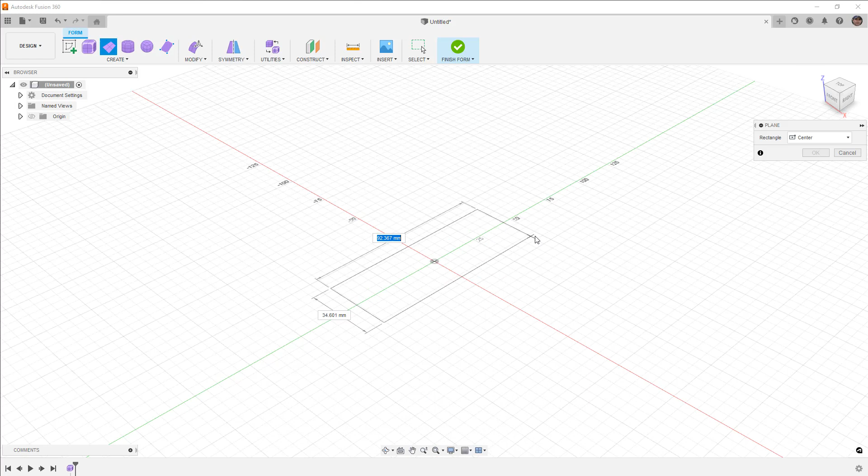So we'll get started by creating a new form, and just like with most forms, we're going to start with a plane. Now with this first method, we're going to begin with a plane at the origin. We want to make sure that we have length symmetry, and we don't want to add too many faces here. Once we have our first sections, we want to begin by making what the hull looks like, at least the bottom of the hull from the side.

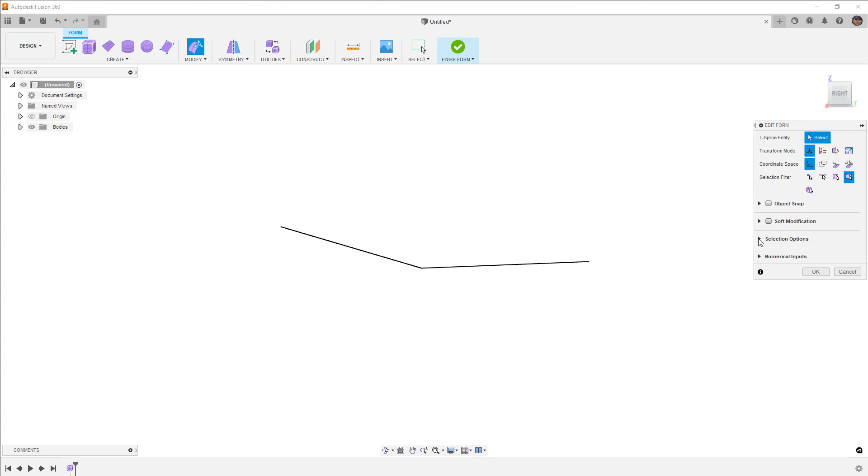So I'm going to go ahead and find my edges. I'm going to move into box display, which is Alt and 1. You can also go into your selection options and select box display here. And what we want to do is just start to build out what this looks like from the side. With these back edges selected, I'm going to hold down Alt and pull this back a little bit, remembering that we never want the transition between edges to be completely straight.

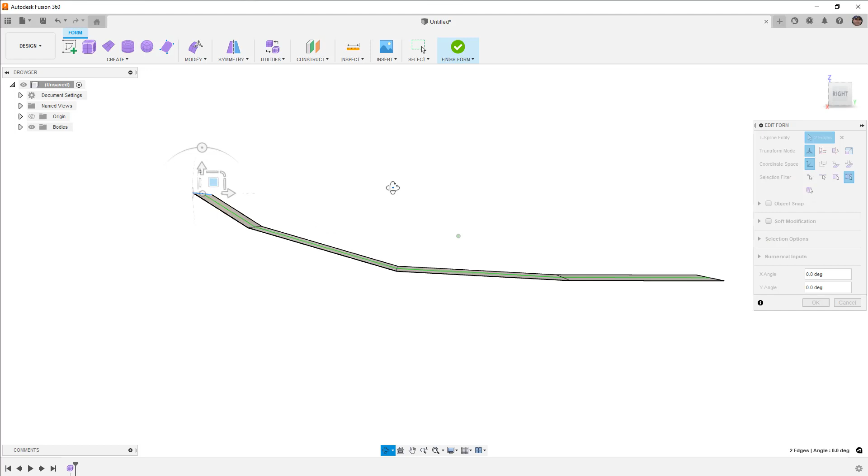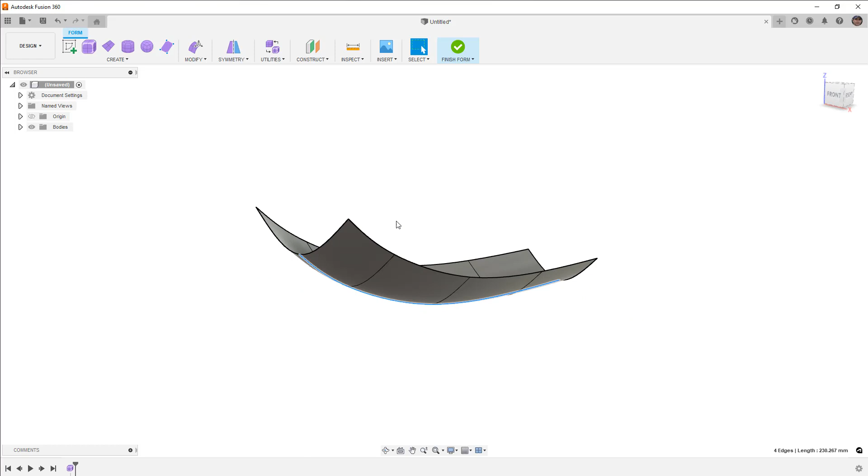Then I'm going to grab the front, hold down Alt, and extrude it once more. Next, I'm going to double click on the midline, and I'm going to simply pull this down. Now, this is not a perfect solution, and you'll notice that I'm not using the Z direction, so my Y distance has gone a little bit off. I'm just going to hit 0 in that box and then hit enter. Now, this doesn't look much like a boat, and if we switch to smooth display, it's really not taking much of a shape yet, but that's okay.

What we need to do is start building out the hull shape. The first thing that I want to do is connect this front edge. Now, there are two different ways that we can do this. We can use merge edge, or we can use weld vertices. Both will give you the exact same result. I'm going to just weld these two vertices, and because we have symmetry, it's going to automatically carry that symmetry line up for us, and we'll say OK.

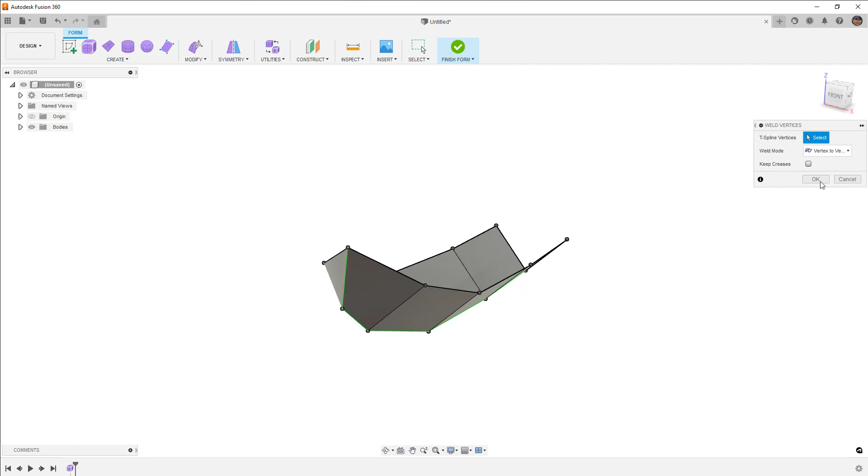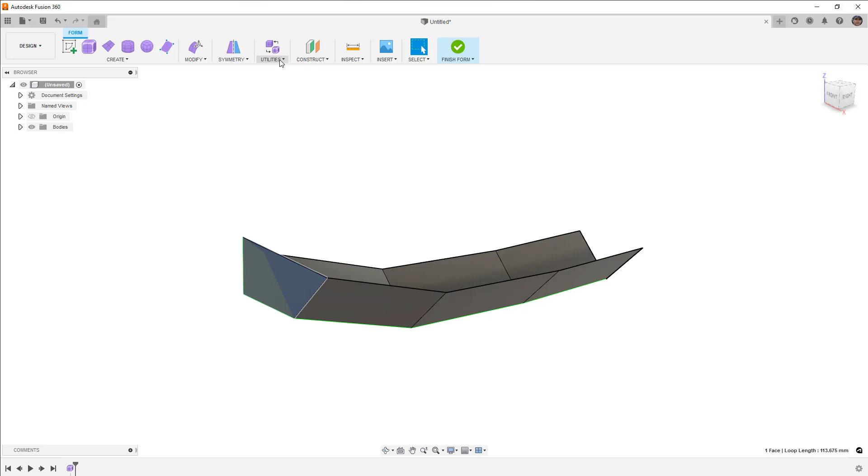Now, at this point, if you try to switch back to smooth display, it will not work. The reason it will not work is because we have this point here, and this point is four-sided faces on both sides, but the point is sort of floating in the middle of space. You'll also notice that the outside shape here automatically has creases on it. Now, when we try to transition from an open face or an open plane and we start to merge these edges, it's important that we go into repair body and notice that there is an error star point here. All we need to do is click on it and it gets converted and everything's fine.

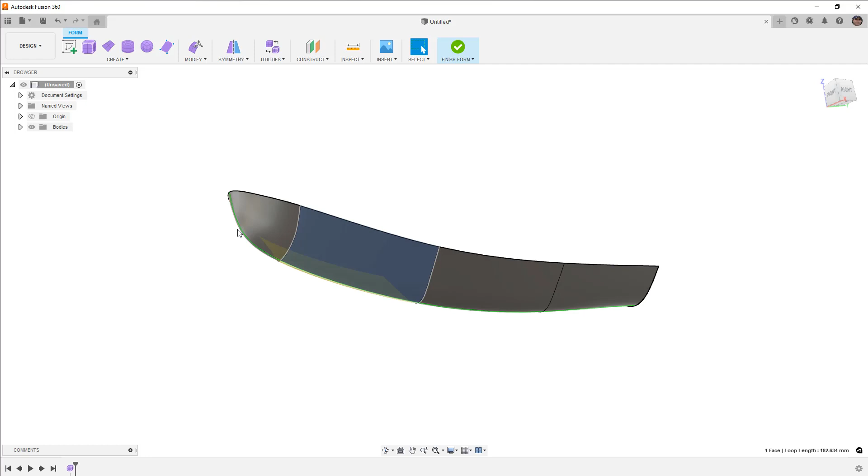The next thing that we need to do is start to think about the tension in these surfaces. Now, the sides are perfectly fine, but because we have this point here, the front is not happy. If we take a look at this in box display, everything looks okay, but because of that point, we get a lot of tension in these surfaces. Now, a couple things that we can do here: we can continue to add edges and try to manipulate the shape, or we can try to turn the front into a triangle. I usually will avoid triangles.

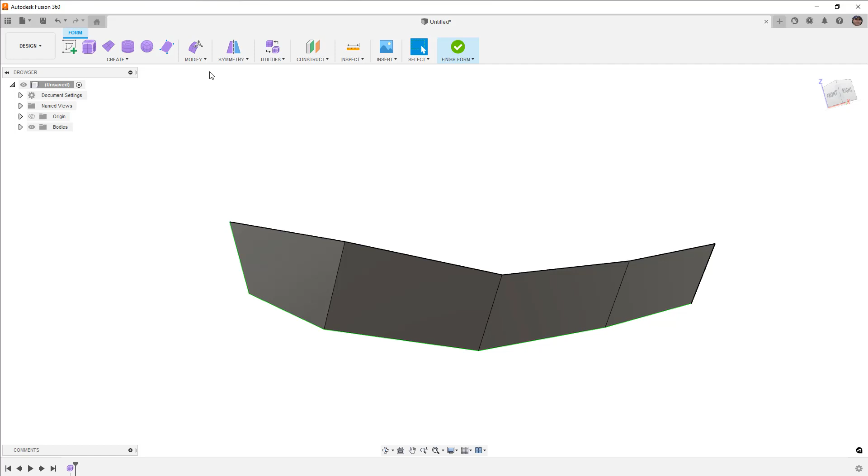I don't think it's a good idea, but let's at least try it at this stage before we add too much detail. To do this, all we really need to do is go to weld vertices. We'll take this and we'll weld it here, and we'll say OK, and then we'll take a look at it in smooth display. So that is a much better solution up front, having these triangular faces, rather than having that vertex that's sort of hanging out in space.

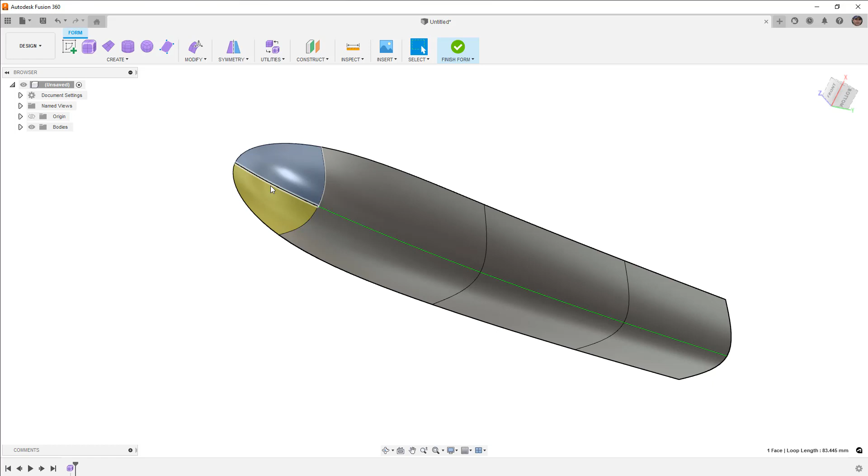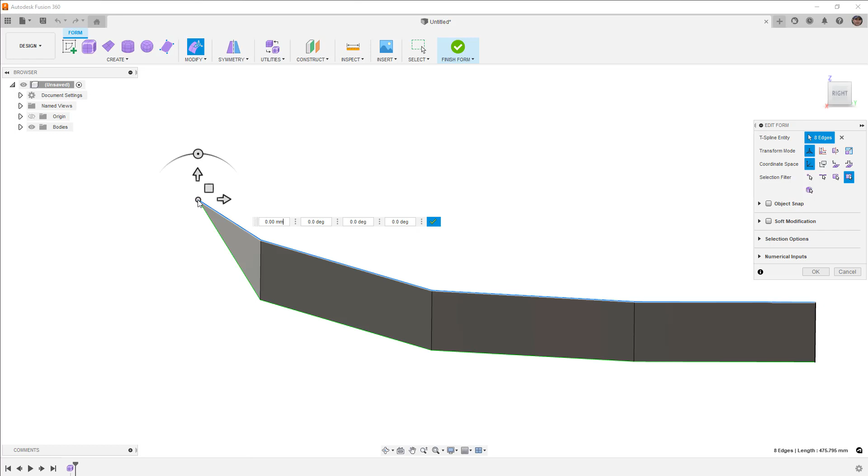So even though one of the general rules that I always say is to avoid those triangles, there might be some designs that really make use of them. Now that we have the general shape, let's start to manipulate it a bit more. With that top edge selected, I'm going to go to my right side view. I'm going to reset my pivot point to the very front, and then I want to scale these edges up. And I'm going to go all the way to 0 and then left click in the canvas area.

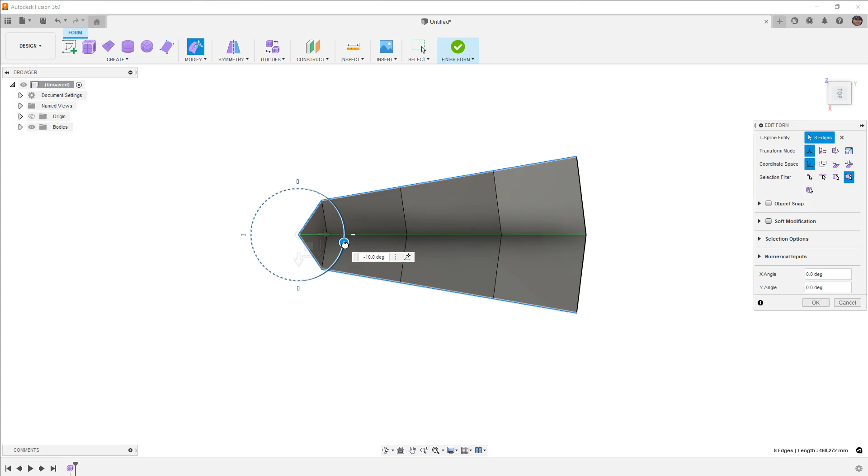Next, I'm going to take the shape from the top. Once again, I want to move my pivot point to the front, and then I'm going to scale them out a little bit. And we can also rotate them because we have symmetry across that midline. Rotating them will allow us to go out whatever the angle is that we've created and start to build out that hull shape. Now, it's not perfect yet, but this is a good starting point.

Whenever we can use the pivot point and scaling edges or rotating edges, it'll really help us control the shape a bit better. But we always do need to remember some of those basic rules. We want to avoid the internal faces having no curvature or no variance between the angles.

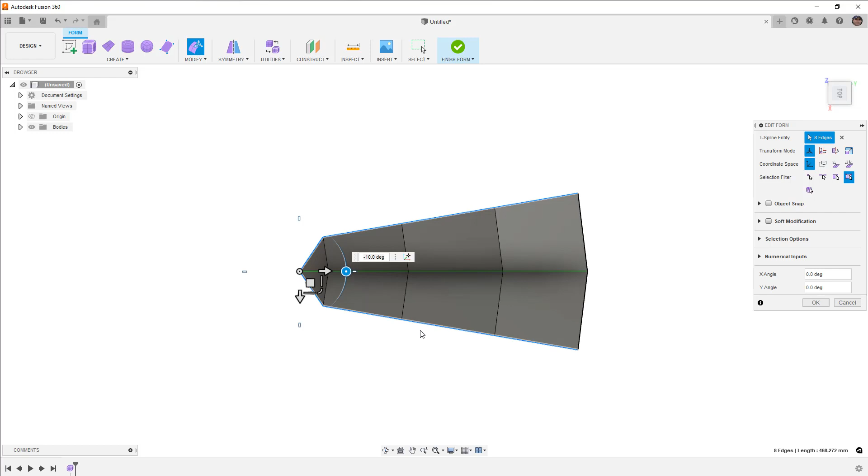This is okay how it is now, but I do want to manipulate the shape just a little bit. I'm going to move things around just visually. I'm not too worried about making things perfect at this point. And then I want to take a look at it in Smooth Display. So once again, very basic shape, but everything is coming together. The next thing that I want to do is I want to continue to add some edges.

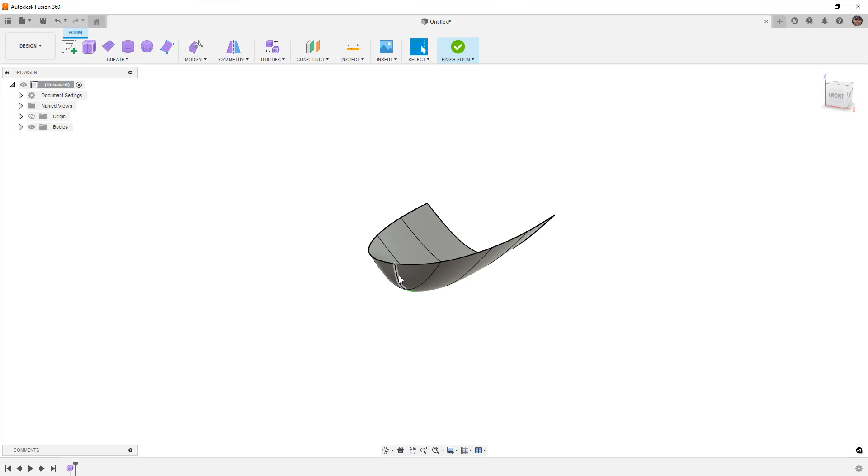Now, once again, I'm not a boat designer. There are a few terms that I'm going to throw around. If they're incorrect, please let me know, but I just want to make sure that we do use some of the proper terminology. Now, this is not a very specific boat. I'm not doing a kayak or a jet ski or a speedboat or ski boat or something. We're just looking at general shapes. But the center section, or the keel that goes down on the bottom, generally does have a bit more shape to it. So I'm going to get started in box display mode.

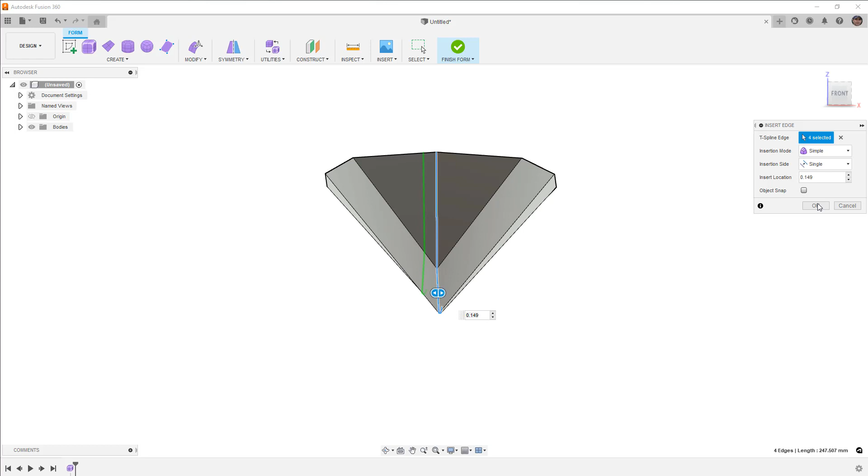I'm going to select that edge, and I want to go to Insert Edge. Remember that when we're inserting edges, Simple is going to put the edge wherever we say, and it's going to maintain a completely straight relationship between the surrounding faces. If we use Exact, we have a little bit less control over where that edge goes, and it's going to subdivide various areas along that path in order to maintain our shape. At this stage in the design, Simple is going to be fine, but we do need to be very careful on how we use it.

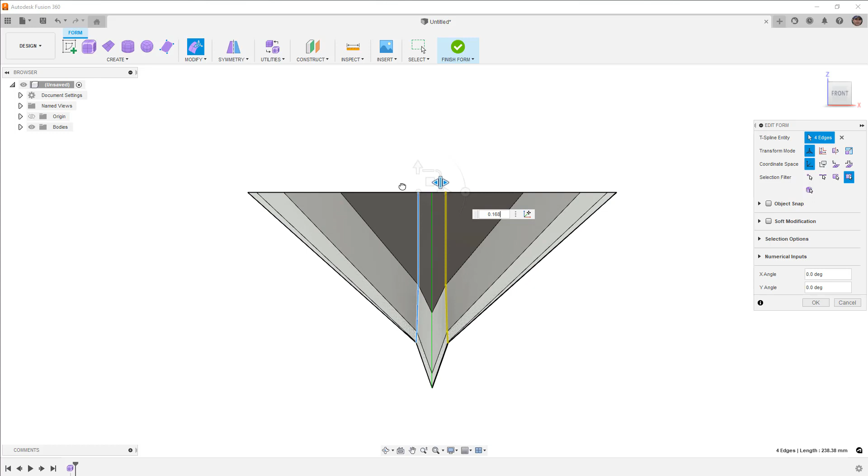So once again, I'm going to select everything here. I'm going to go to Modify Edit Form, and I'm going to reset my pivot point to the top. Then I'm going to scale this down a little bit, and I'm also going to scale it so it's more vertical. And then I'm going to take a look at this in Smooth Display. So again, we're starting to make that keel section where we've got that deep V that rides in the water.

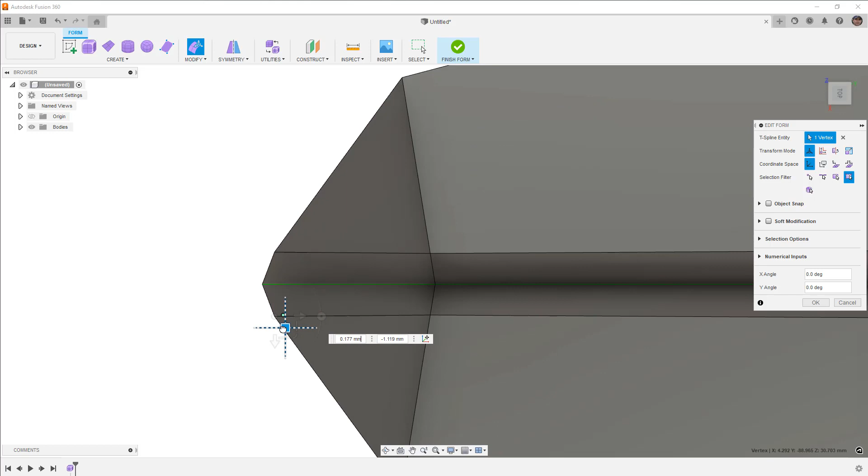Now, once again, I'm going to go back to Box Display because we do need to fix a few things before we move on. We want to make sure that the way that this transition happens up front is very natural. Everything else from here back is going to be okay, but we do need to make sure we control that front and always check it in Smooth Display to make sure that things look okay. This is one of the problems with using forms for this type of design: you really need a lot of detail in certain areas, and those are going to be difficult to achieve with this type of modeling.

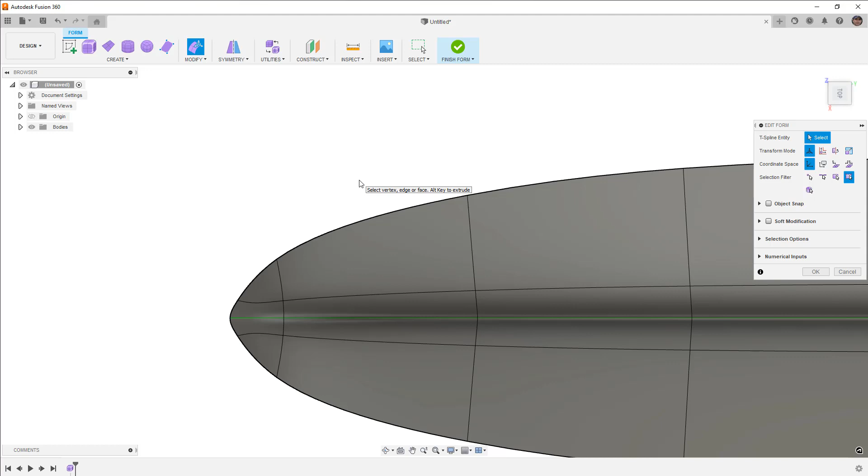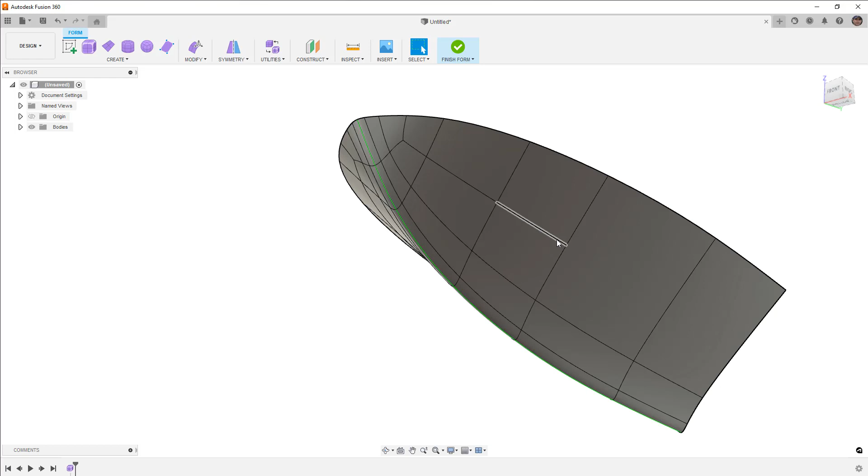So what I want to do is I want to carry on adding a bit more detail. I'm going to go ahead and add another edge. I'm going to double click this one. This time I'm going to insert the edge, and I'm going to use Exact so we can see what this looks like and say OK. And you can see how it divides this up. It begins to add these subdivisions here, and you'll notice it added a couple here, and it ends at a T-point. Now, T-point is going to cause us problems, but for right now, what it did was it kept the shape the same, so I'm okay with that.

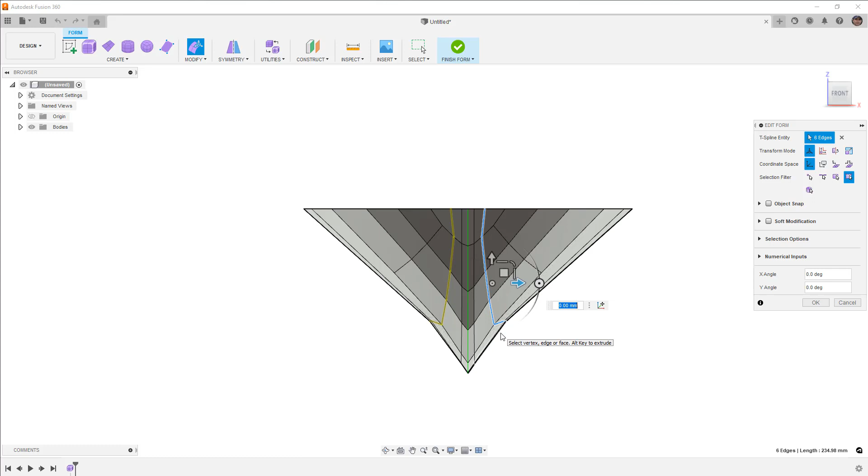I want to take this edge, and once again, I want to begin to manipulate it to get my shape. Now remember that with simple insertion mode, it essentially put it completely flat between the faces, but with Exact insertion mode, it's maintaining that shape. What I want to do is, once again, reset my pivot. I'm going to put it up top. I want to scale these down a little bit.

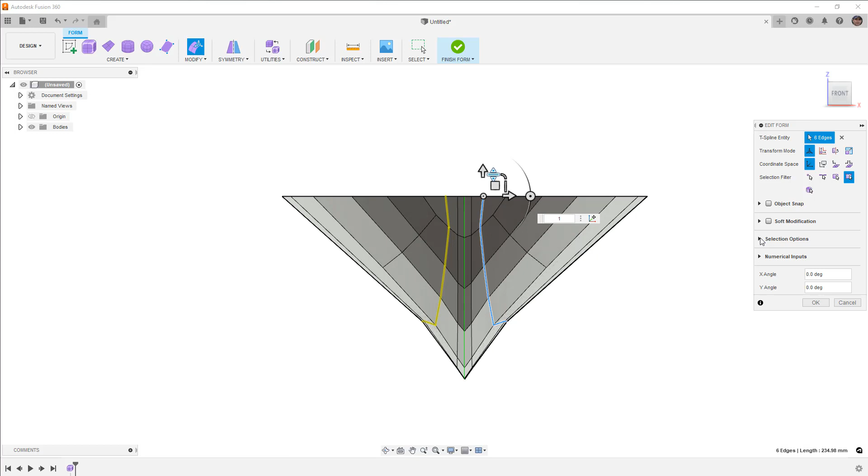And there's something with Fusion right now. If I try to use Alt and 1 and Alt and 3, what it's going to do is it's going to put that in my dialog box. So if you need to go back and forth between box display with something selected, you need to go into your selection options and go to Smooth Display here. Or you just simply need to deselect that edge, then you can go back and forth just fine.

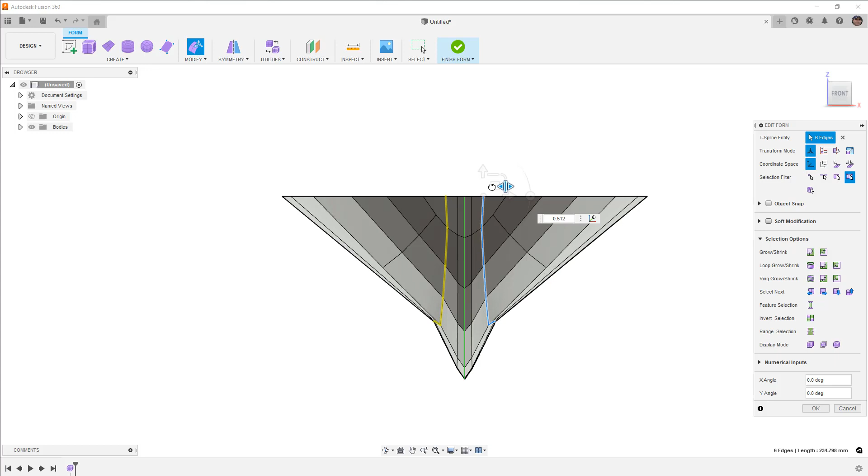Everything looks okay so far, but I want to take this edge, once again, put my pivot point up top, and I want to begin to scale it again horizontally to sort of pull it in a bit tighter, and then take a look. Once I'm happy with the keel shape, then I want to begin to start to work out the rest of this hull.

Now, in order to do that, I'm going to carry on this T-point, and I'm going to carry it all the way back. And to do that, we'll use Insert Point. We won't be able to use the exact insertion mode for this because it's not going to let us select the end. It will only let us select along another edge for some reason. So we need to use simple. And I'm simply going to click on the red point or the midpoint of each edge going back and say OK.

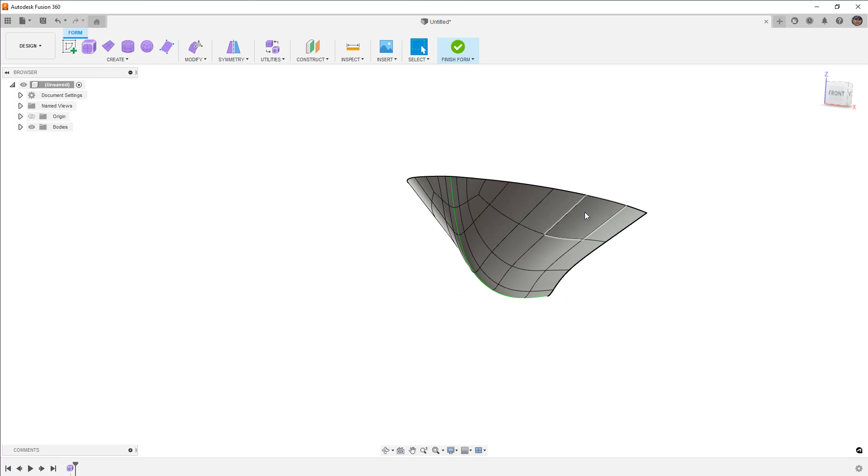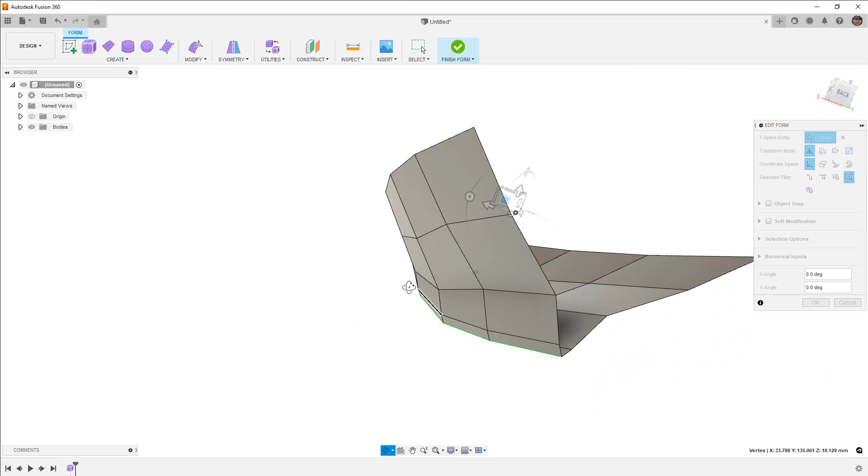Now remember to go back to box display and note that these are going to be perfectly flat, so we need to move that vertex. So I'm going to start by modifying it and just pulling it down a little bit, and we'll need to do the same thing on the vertex on the back. Just pull it down to make sure that we have at least a little bit of shape. It's not a perfect solution right now, but it will get us a little bit closer, so we can take a look at this in Smooth Display.

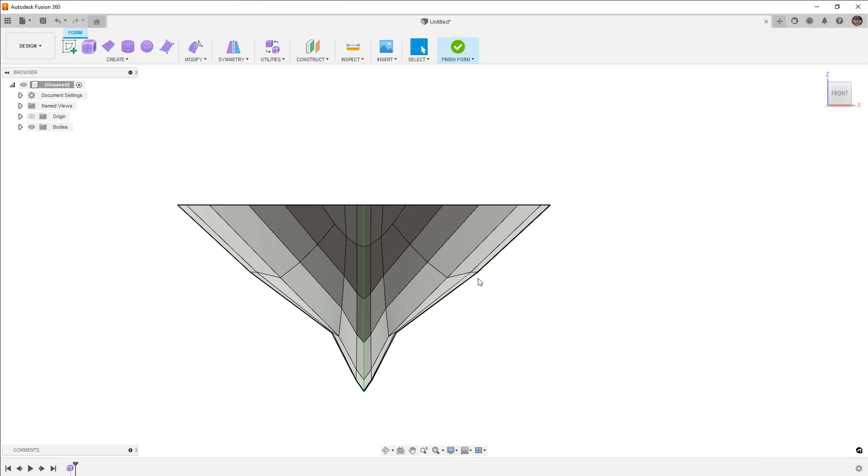So now we have a shape, but we need to add more detail. Now, generally, I would say take this into the surfacing environment and then begin to add the detail there. However, if you want to play around with trying to add detail, this is where you begin to start to work yourself into a corner. So it's important that we at least understand what happens when we try this. Before you begin to add more detail, I do think it's important that you take the time and make sure what you have so far is going to work for your shape and your design.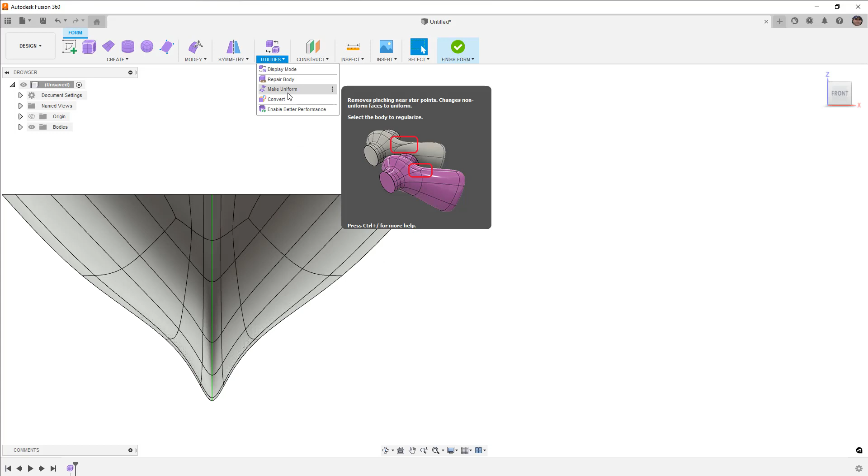So for example, I'm sort of moving these things around and I'm looking at the lines that we have here in box display. And the main reason I'm doing that is because when we do that in box display and we use the utilities make uniform, it's going to help normalize the distance between those edges relative to the smooth display. So if you spend the time trying to make all of these faces a roughly equal shape in box display, then when you use smooth display, it'll really help.

And what I want to do is I want to move just a couple more things around just a little bit, and then I want to insert another edge. Now it's tricky at this point because we don't have that triangle that we initially started with.

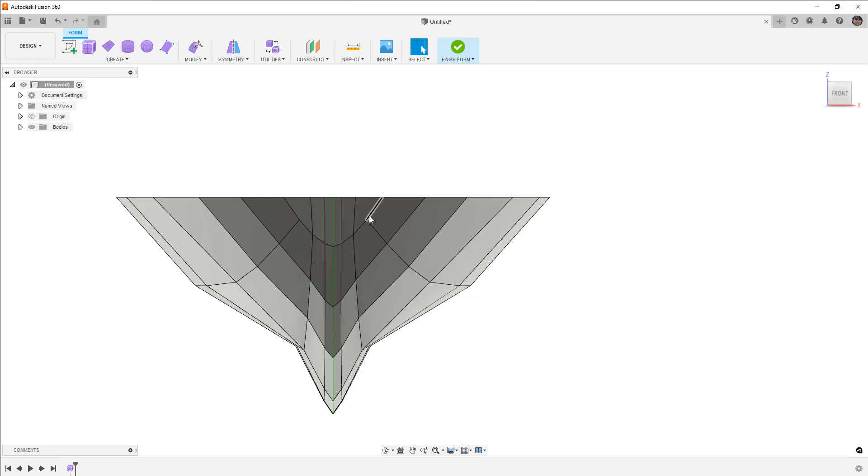When it uses the exact insertion mode, you can see here that now we've got this T-point, which is essentially creating a face that has 4 sides on it. Now it looks like a T-point, but in reality, we're maintaining a 4-sided face. You might find at some point in your design that you need to turn that into a triangle. And if you do, just keep in mind that it's going to be tricky to define what happens up front.

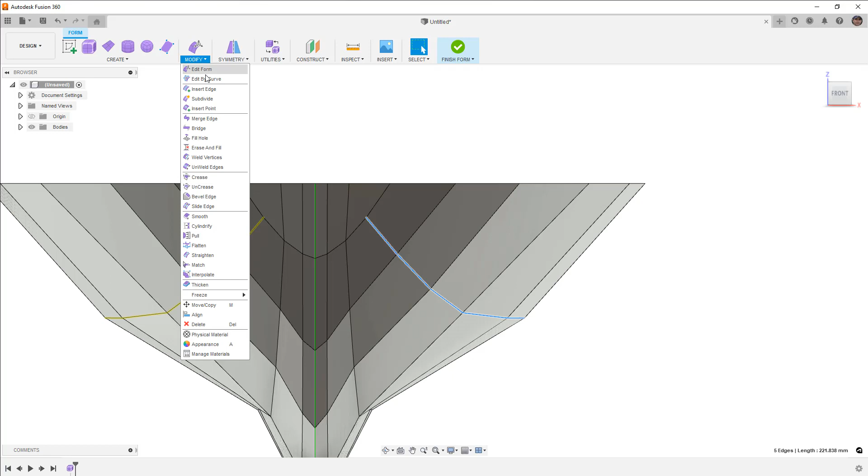But you can see that Fusion automatically turned that into a 4-sided face for us, and the rest of them are 4-sided as well. So I'm simply going to double click this edge. I'm going to go to Insert Edge. I'm going to use the simple insertion mode and both. And I'm going to put these relatively close. Now, this is generally going to be very bad for us, but I at least want to show what happens and how we can possibly work around it.

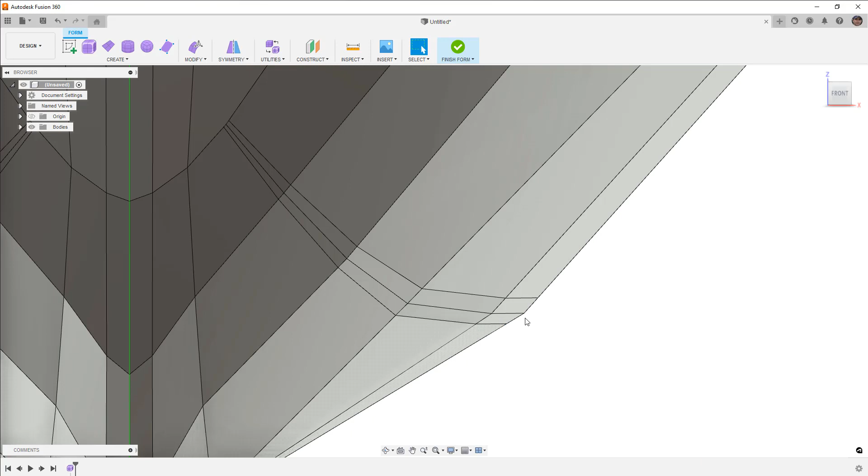So the first thing that we need to do is remember that we don't want things to be perfectly straight. When we add these on both sides, these edges are essentially collinear, and these edges are collinear as well, and that's something that we need to fix. So I'm going to double click, go to Modify Edit Form, reset my pivot point up front, and I'm going to deal with the front in just a second, but I'm going to scale these in. I'm going to do the same thing to this edge as well. Reset my pivot point, and I'm going to scale these in as well.

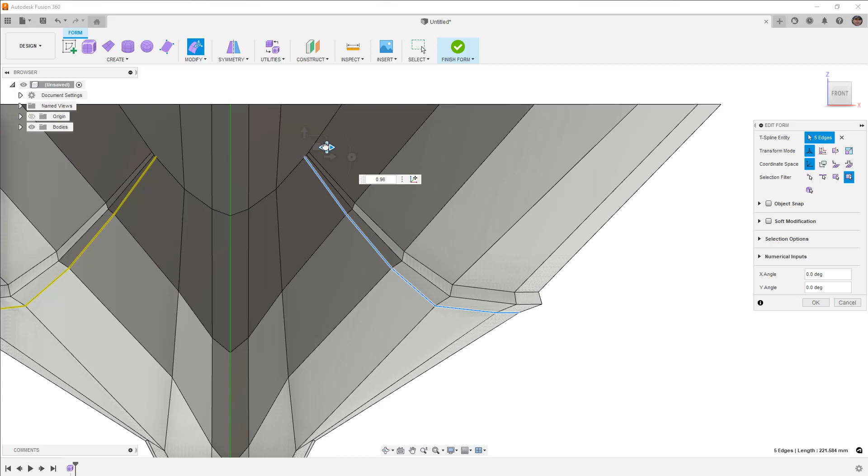Now before I get too far, let's take a look at this in Smooth Display. You can see that we're starting to add those chine details. Now this is really not the best way to do it, and again, I want to just give a word of caution there. And the main reason is because of the way that this shape is going to terminate up front.

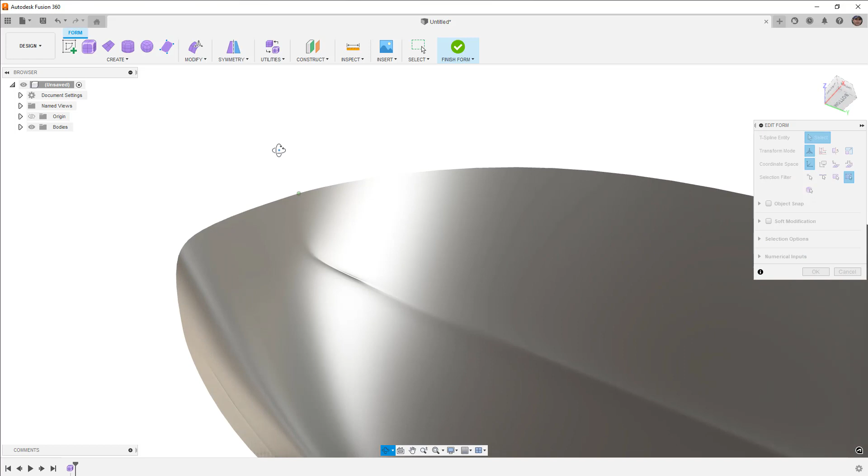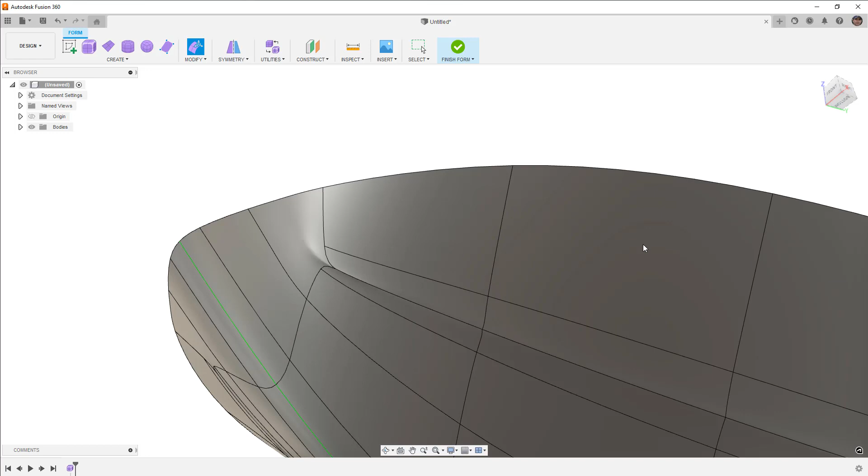Now, this is something that generally you need to be very specific about on a hull design. This is usually going to go all the way across the front and back around the other side. And here, what's happening is it's ending in this section here. So you would really need to spend a lot of time making these edges transition across the middle. So that's what I want to focus on. I'm going to go back to box display.

We're going to go to Insert Point, and I'm going to carry this point to the middle of this edge, and I'm going to carry it across. Now remember, we're using simple insertion mode here, so we need to do a little bit of work before we get too far ahead of ourselves. And I'm going to pull this up. I'm going to pull this one up as well, and maybe pull this one down a little bit. So what I'm trying to do is carry that shape across the front of the hull.

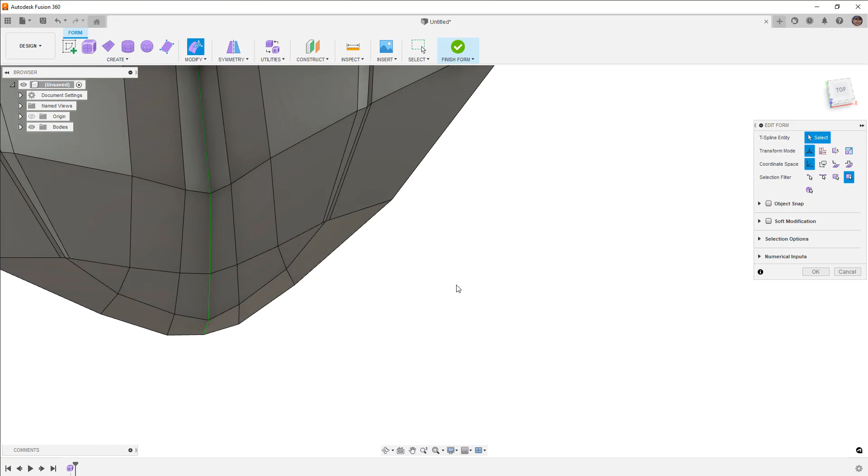I really want to pay close attention to the angles between these edges. I don't want them to be too drastically different. And remember, we're only looking at it from the side right now. We also need to make sure we look at it from the front or the top and ensure that we do have a nice gentle transition for what we're doing here.

The next thing that I want to do is carry this shape across. So once again, insert point. I'm going to go from here. I might want to widen the gap here or narrow it down depending on the type of transition you want. Narrowing it down will bring it more to a point. Widening it will let it sort of blend away.

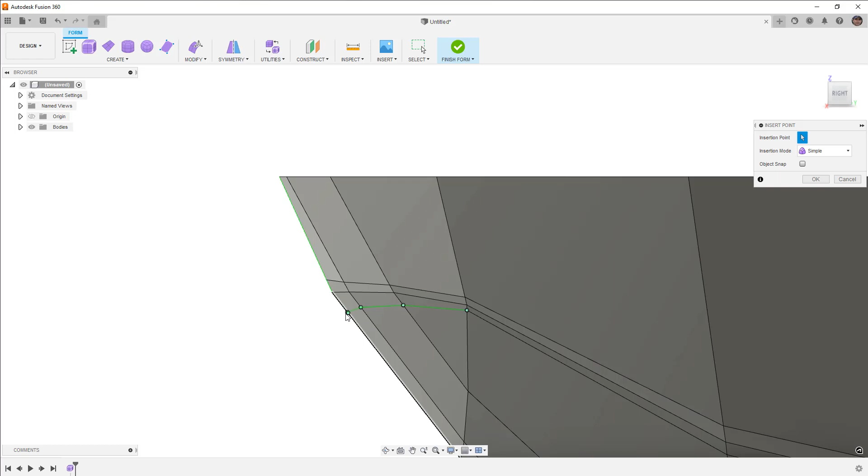And then once again, we need to move these around because we want to make sure that we don't have a flat section between those edges. And I can't stress that enough. That is the killer of most of these designs that I've seen, when you try to add too much detail, too many edges, and you end up with these flat sections.

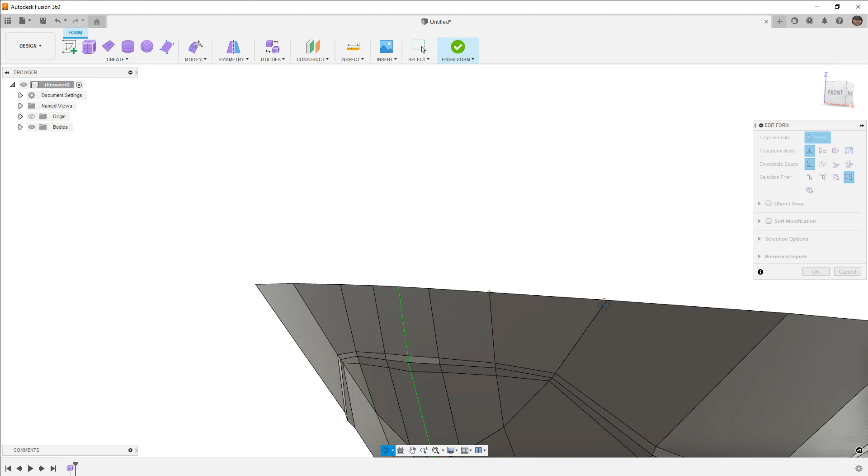So let's take a quick look in Smooth Display, see what this looks like. I'm going to hide my edges using Control and 4. And we can see that detail goes around the front of the hull. And this right here, it's going to be kind of hard to see on the video. There's a little bit of a bump right there. That is most likely just a graphics issue and not something that I'm worried about.

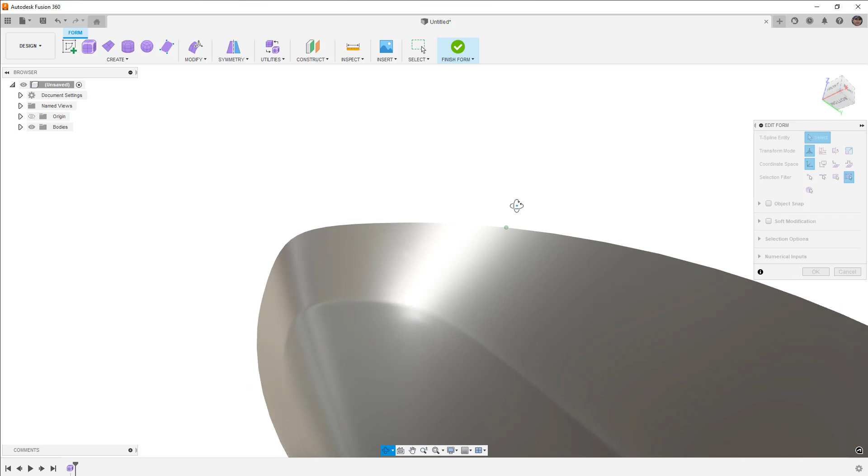But now we've got sort of the layout of the shape. What we can do is we can continue to refine it. I mentioned we're not going to completely model this boat, but these are the types of details that really, again, can make or break a design. So I want to spend a little bit of time refining this.

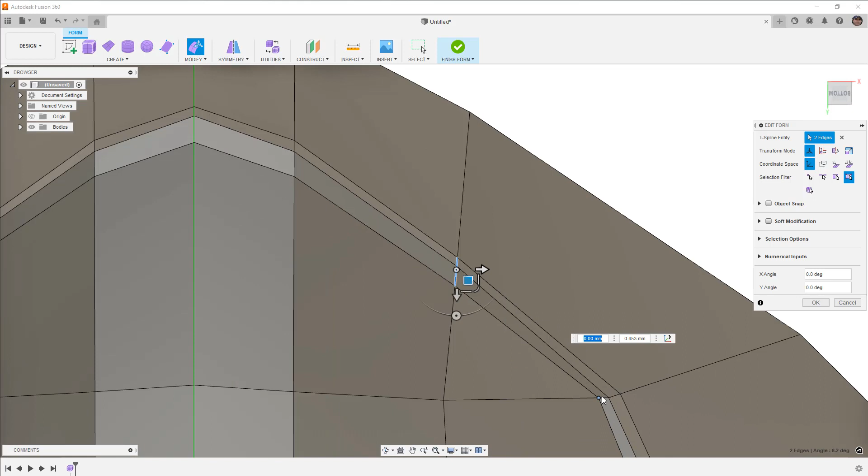What I would likely do is I would take a couple of these edges, maybe these two, and begin to pull them back a little bit. And then maybe take these two edges and pull them in a little bit. But no matter what we do, we are transitioning through a triangle here, which is going to be a tricky transition. And it's going to take a bit of work to play around with. But you can see that we are getting something. There's a little bit of a dip there because of that triangle.

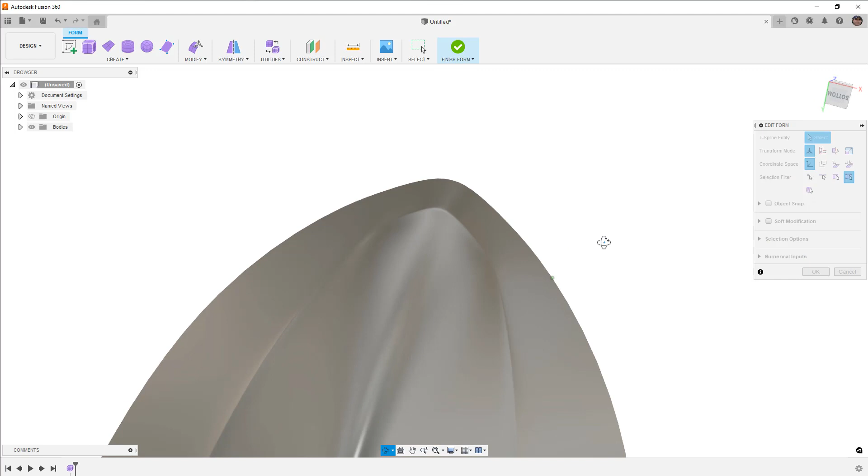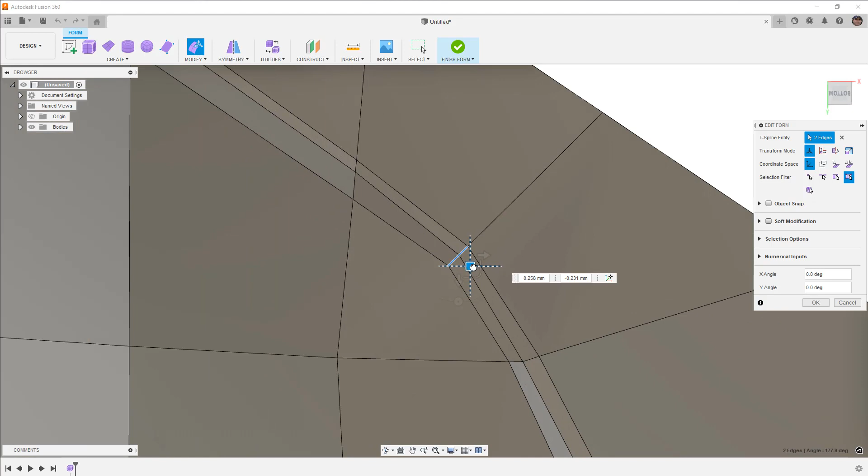So if you have that issue, you're going to have to spend some time retopologizing this to get rid of that triangle. And the main way that we would do that is we would use, I'm sorry, Insert Point. And I'm just going to bring this to here to sort of make a point. And I'm going to grab these two, pull them out. And once again, this does make a completely flat section. So we want to be mindful of the curvature we're trying to achieve.

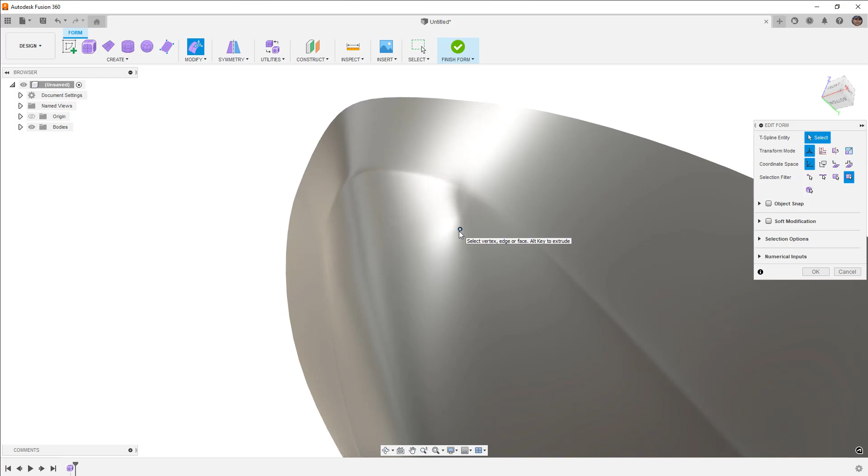You can see that it's sort of bumped out. I'm going to bring that in. And then take a look at it in Smooth Display. Control 4, hide my edges. And you can see that it created an extra little bump there that still needs to be fixed. At this point, before I tried anything else, I would try Make Uniform, see if I can relieve some of that tension there. If not, then what I might do is go back to that triangle and just kind of continue to work with the triangle.

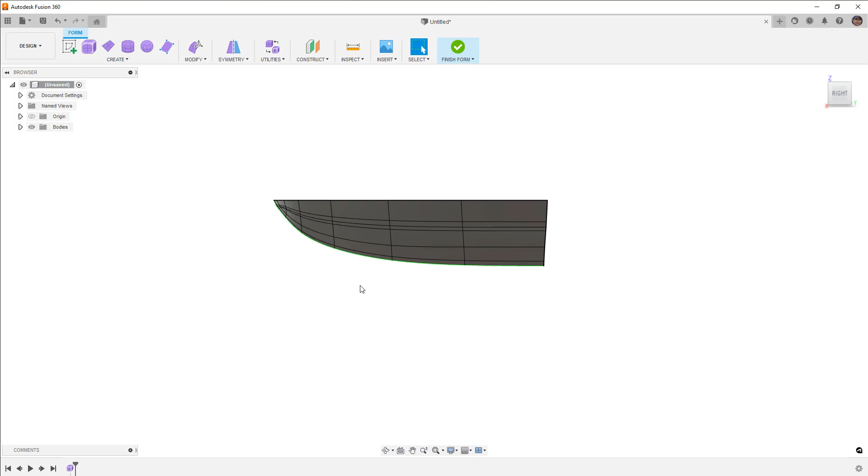Okay, so at this point, we've done quite a bit in terms of laying out a general shape. Hopefully you start to see that it's going to take quite a while to get something like this to work. So what I want to do is talk about a second potential method that I would use to start a design like this that is completely different than anything else that we've modeled. So this is the modeling approach that we would use for most designs. But now we're going to flip it on its head and try something different. So now we're going to create a sketch. I'm not going to do a complete hull again. We're just going to talk about some basic process.

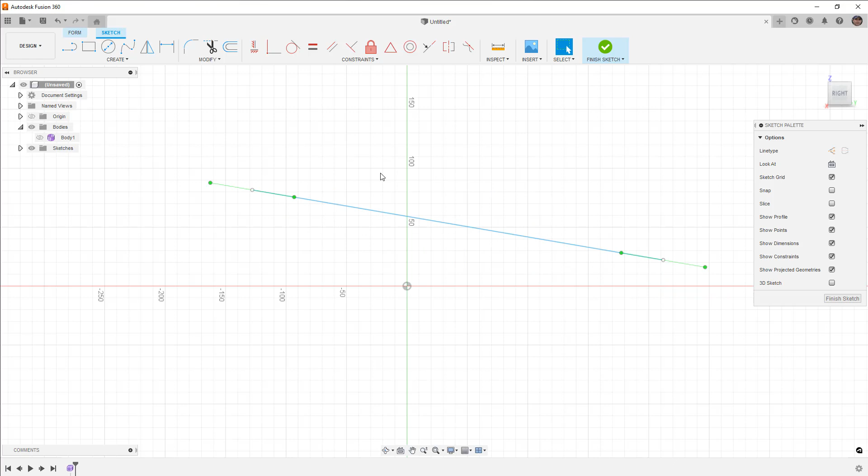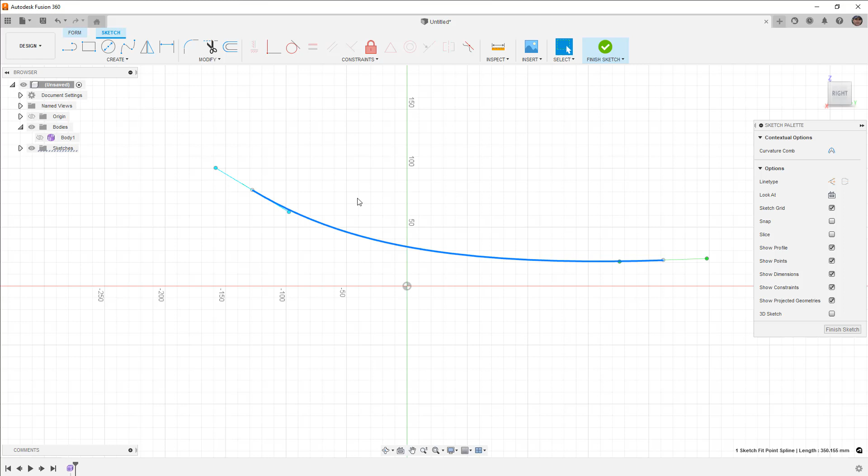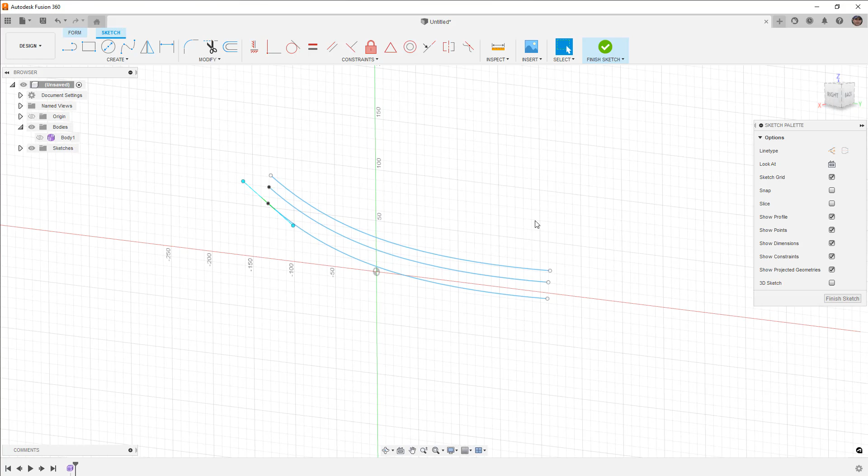What I want to do is I'm going to take a spline and hit Escape, and I'm going to start to make that sort of side profile, what you would typically see on these chines as they go from the front of the boat all the way to the back or the transom. Once I have this shape, what I'm going to do is select it and use Control C and Control V to copy and paste it. And I'm just going to make another version of it. And I'm just going to work with probably 3 edges just to kind of show the process here. And now we've got 3 splines from the side that are essentially the same. They're just copied and pasted.

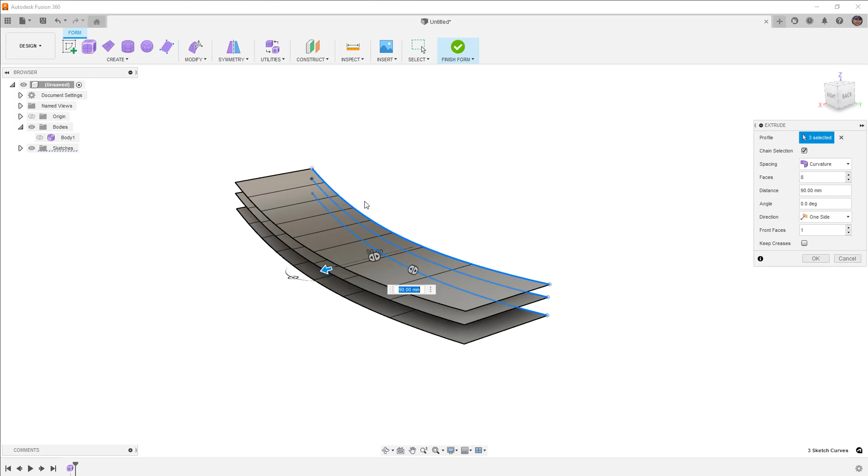What I'm going to do is I'm going to take each of these and extrude them out. I'm going to grab all 3 at the same time, and I'm just going to pull them out. You can make them symmetric and use like a midline symmetry. I'm not going to go to that level, but we're just going to talk about what we want to do with this. The big thing that we should always worry about is the spacing should be uniform. We always want to try to have uniform spacing in our designs until we get down to the level of detail where we begin to add all of those extra edges to get creases and to get transitions of shapes. At this stage, everything should be as close to uniform as possible.

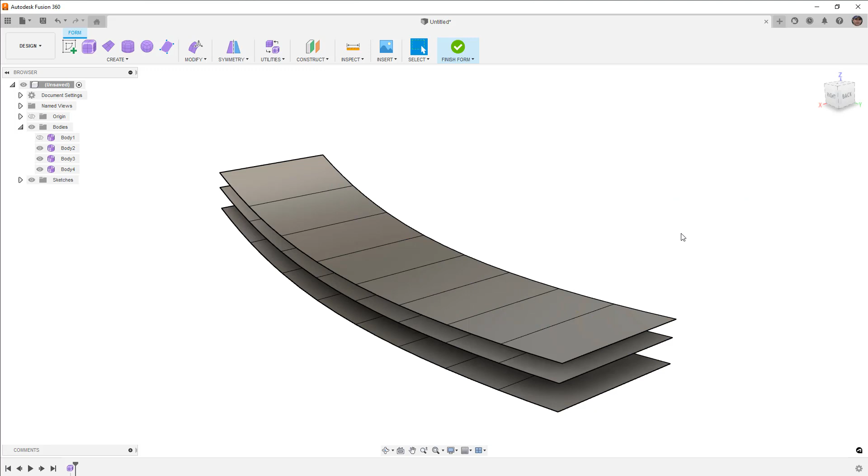So we're going to say OK, and then we want to begin trimming these. Now, we can do this a couple of different ways, but the main way that I'm going to do for this example is I'm just going to simply use Insert Point, and I'm going to start to trim them basically the shape of the hull.

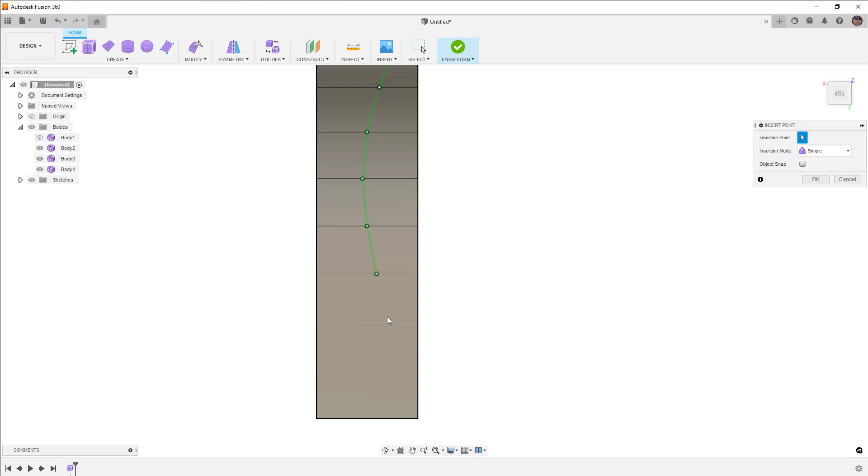Again, we're not making an entire hull. I'm just looking at a very general process, and I'm probably going to get rid of most of this information on the back. Then I'm going to double click this outside edge and simply hit delete. So what this gives me is the hull shape on the outside relative to that spline from the side.

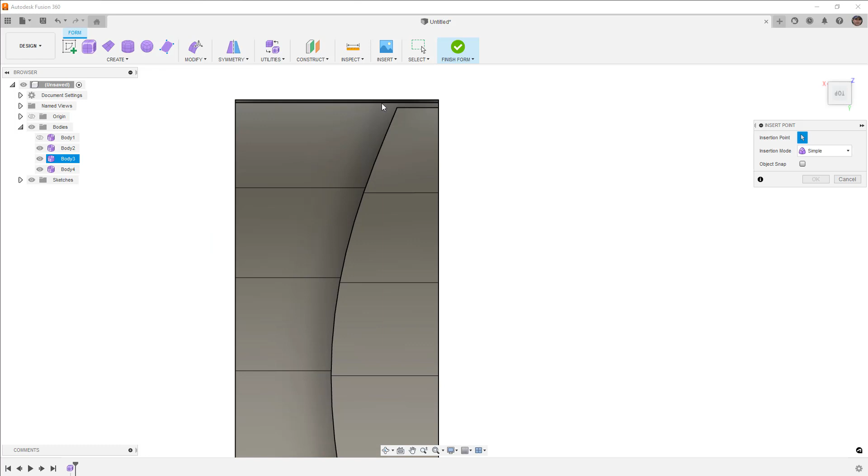So again, we're going to go to the top. We're going to repeat that insert point. This time it's going to be out a little bit further because as we go down, what I'm going to assume is that the boat is getting wider. In reality, it's getting smaller, but I'll show you how to deal with that in just a second. And we'll say OK. And once again, take that outside edge and just delete it.

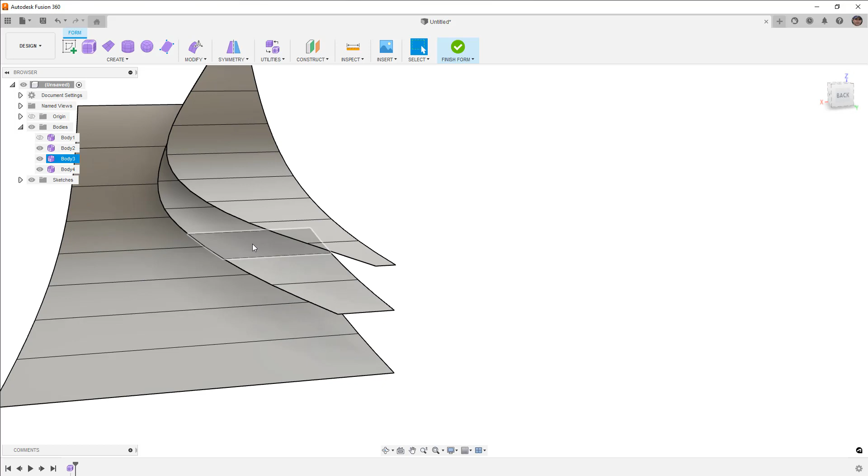Now at this point, if you've decided that this needs to be smaller, what we can do is we can take that edge, we can go to insert edge, and we can just put another one wherever we want it, and then delete this one. So now you can see that the hull is getting smaller as we go down.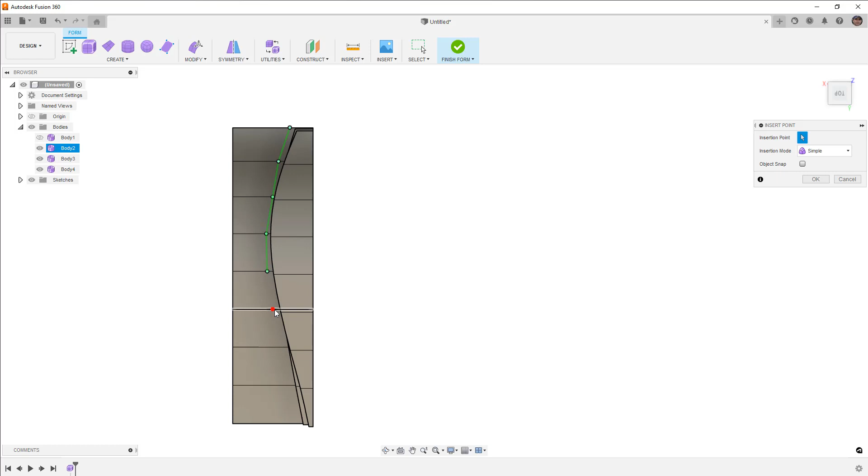So last, we want to do the same thing to this third section that we created, insert point. And once again, I'm going to follow it from the top. I'm going to kind of change the shape just a little bit, maybe make it wider or narrower. Say OK. I'm going to take this edge. Once again, I'm going to insert an edge. We're going to do single. I'm going to put it over here. And then we can delete the outside edge and delete this second edge.

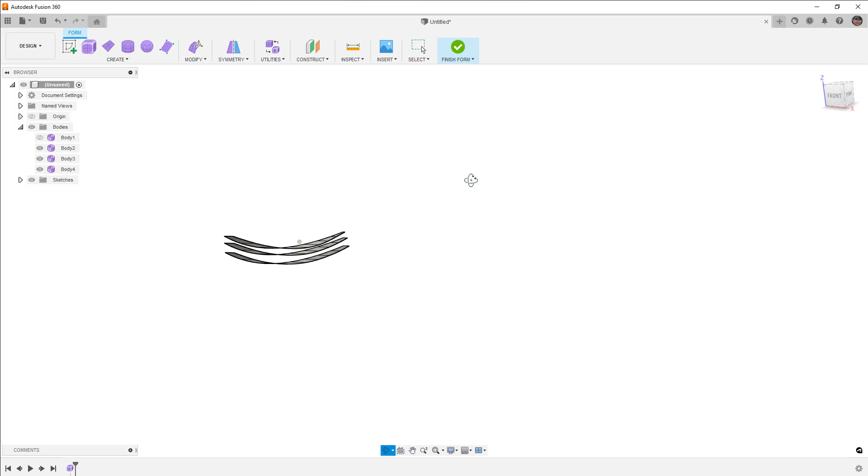So at this point, what we're doing is we're essentially looking at this how you would build a ship. So essentially you would build a ship by using these sort of ribs or the skeleton structure. Now in general, that skeleton structure is running in a different orientation, but what we're doing is we're building it from a horizontal cross section and working our way down.

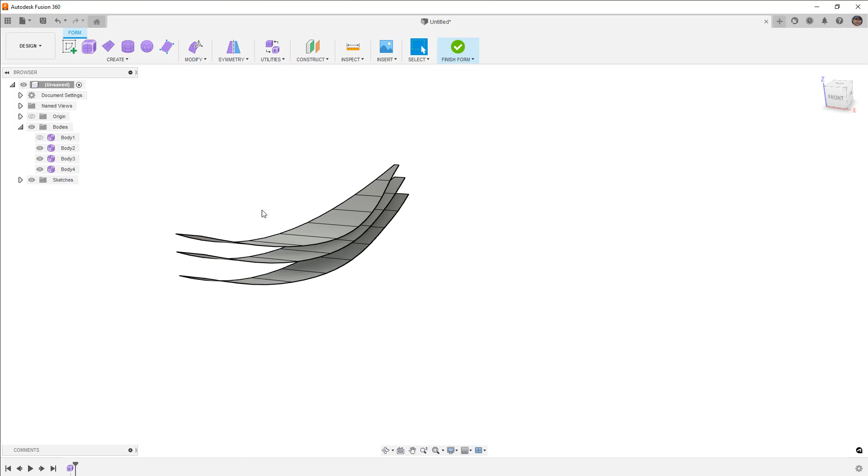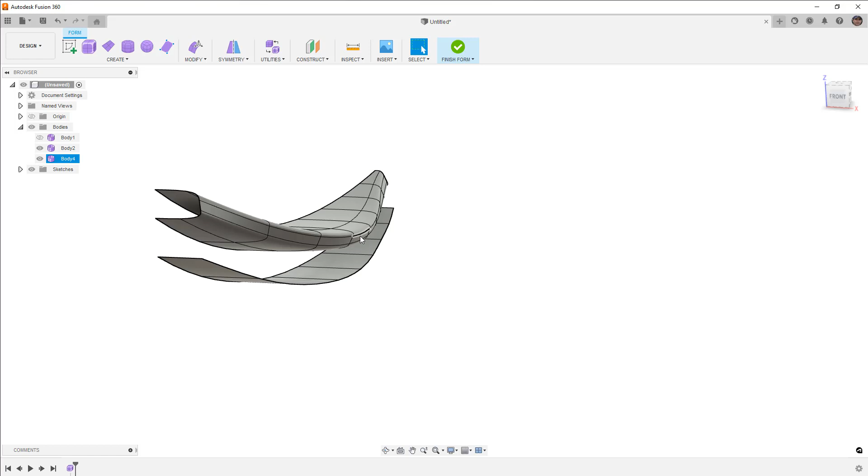So what I want to do at this stage is I'm going to use modify and bridge. I'm going to double click this edge for side 1. I'm going to double click this edge for side 2 and build my bridge. Now you'll notice that this is not really what we would expect to see. There's a good reason for that. I want to go into box display. So we're going to select the body. We'll select this one and go into box display.

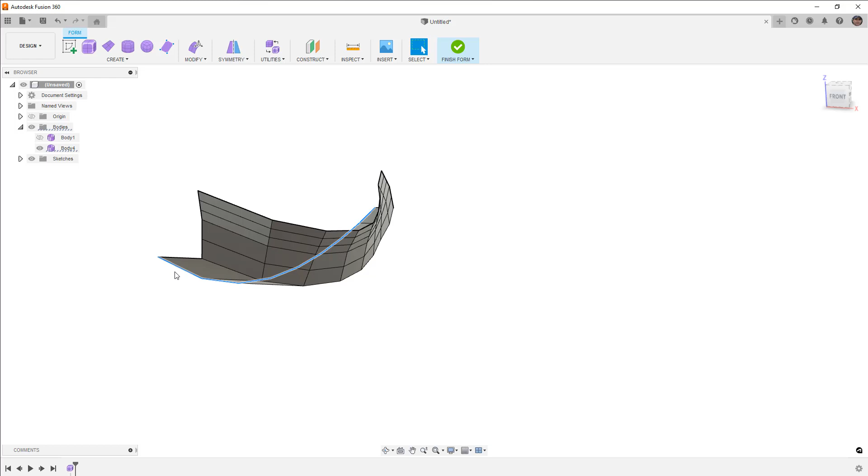Then I'm going to take this upper edge and delete it, and take this lower edge and delete it. Then I'm going to go back to bridge. We're going to go from here to here. We can use 3 faces, and I'm going to change it to 2 just to show. And then double click this edge and delete it. Now if we take this and look at it in smooth display, what we're doing is we're building the side of the hull.

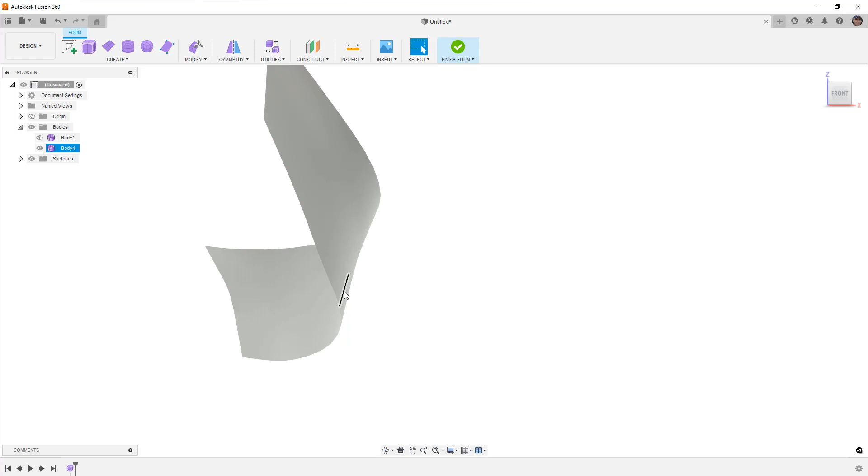Now this method takes a little bit more planning. You really need to have some references, some sketches to go by, but essentially you are going to get a smoother result than trying to manually design this hull. If we try to manually add edges and extrude edges and bring things together, what we're going to end up seeing is that it becomes pretty difficult to do.

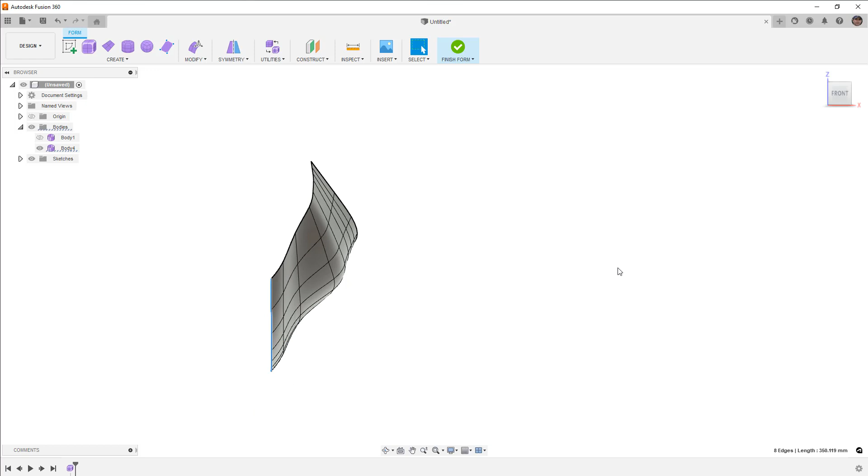So as I start to pull this around and then maybe come down to the keel, come over, and then we can mirror this to the other side, that method of building out a good portion of the hull and then adding a couple of extra sections that are needed is going to be much easier to get that smooth final shape than it is to build it like we did originally. Like we spent a lot of time trying to build this hull and add some of those details.

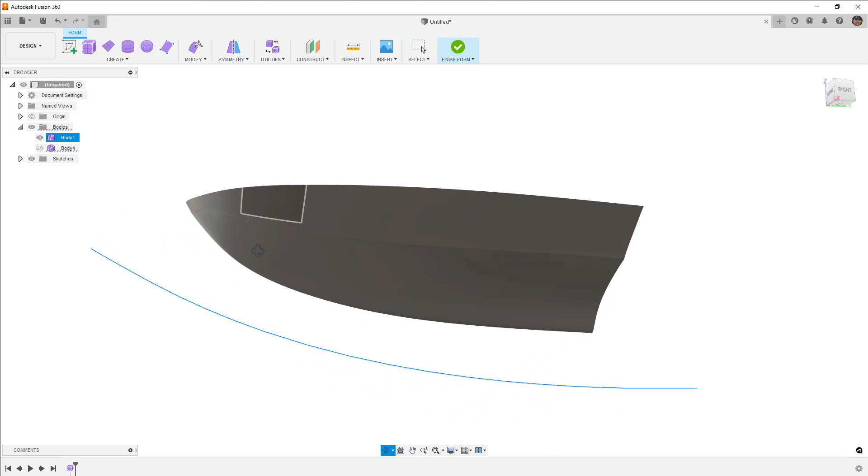But if you build it from those sketches from the side and you begin to extrude them out, trim them, delete sections away, what you're going to end up with, again, is just a different way to think about designing with these form bodies. Now, as I mentioned, I don't want to go through the process to design an entire boat hull because there are so many different kinds.